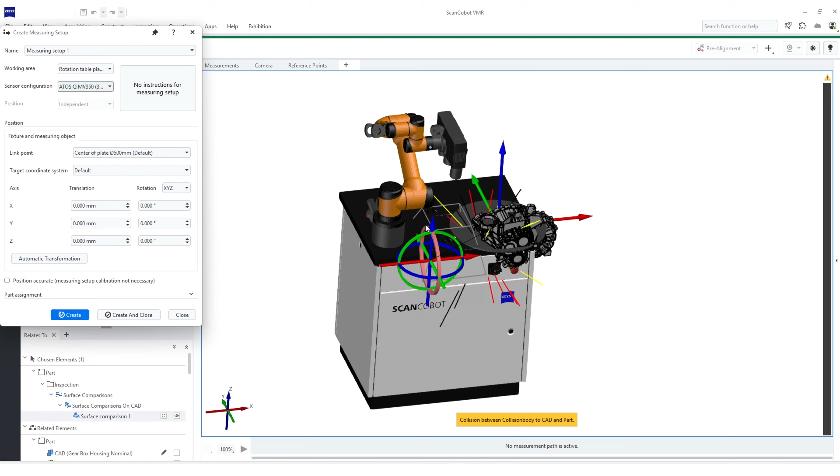Now we can use the powerful function Smart Teach in the virtual measurement room. Here we can calculate measurement positions based on our features and the CAD model. As you can see, we already have a full measurement program. What we do now is simulate the data that would probably be achieved if we ran it on our system.

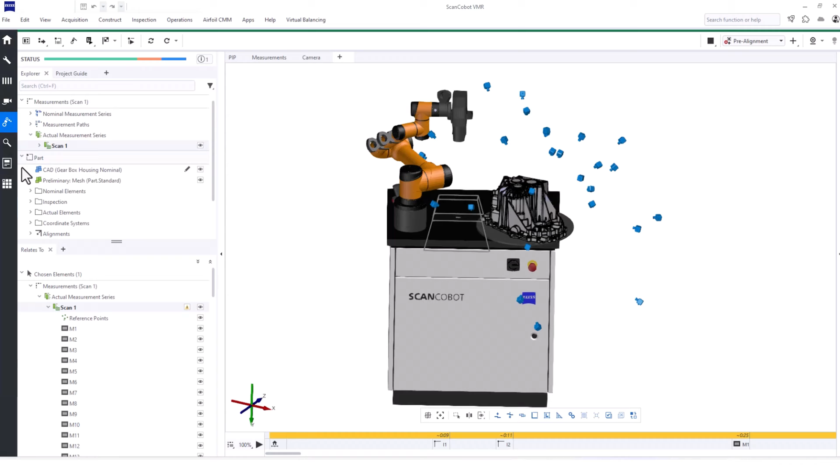When we look at the results, we observe that nearly all of the part is measured. If you like, you can even add manual measurements. For this, we just use the handles that are visible when clicking on the sensor. With this, we can position the sensor and add another measurement to our program.

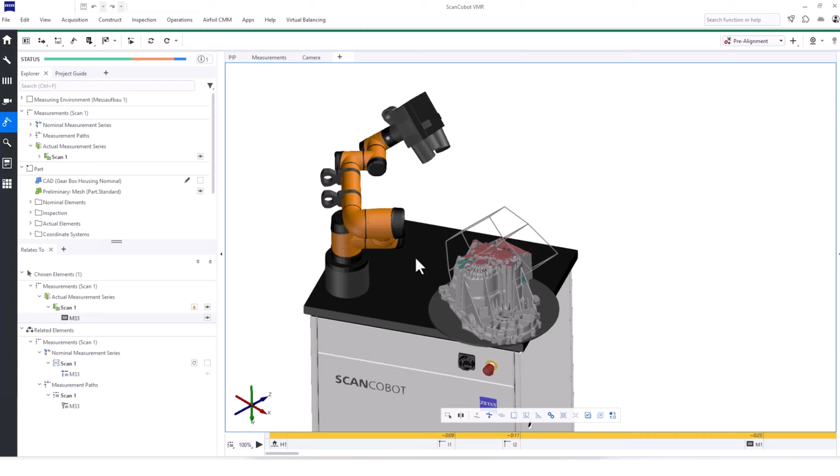You can use Shift and the left mouse button to automatically position the sensor in front of the part surface. That's how easy it is.

Now, we only have to run the project once on the system and create a template out of it to execute it in the operator kiosk mode.